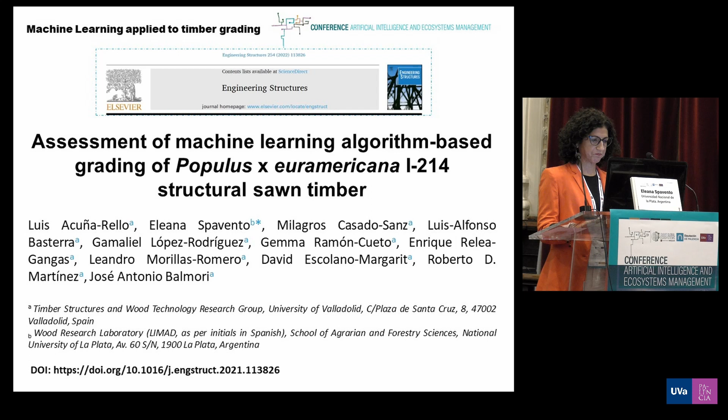So, to start talking about our work, I will pose a question. How is structural sawn timber graded? So, firstly, the species and provenance should be known. Then the sawn timber is inspected and its defects are evaluated and measured to grade it according to the standard. In this case, we use this Spanish standard because it's the only one that includes Populus spp timber, and it has two timber grading classes, ME1 or very good timber, and ME2 or lower quality timber or good timber. The third class is rejected or non-structural class, where the bad timber is included.

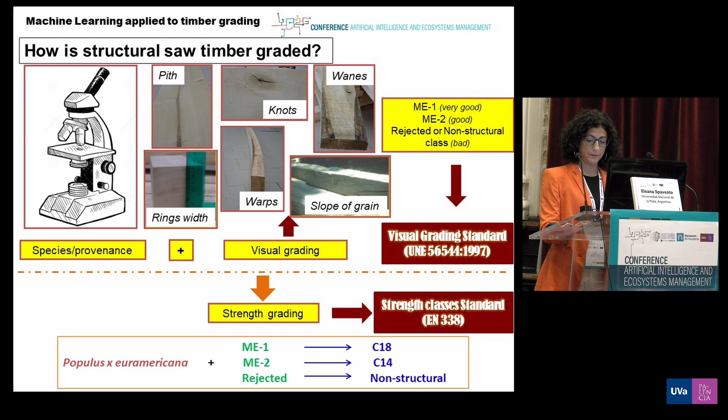Later, we assigned the strength class, and in our case, we use the EN 338 standard. This assignment is very important because it gives us reference values without hard and expensive laboratory tests, and gives sawmills a big opportunity to add value to their products. In this picture, you can see the visual grading classes, and in this graph, you can see the strength classes standard.

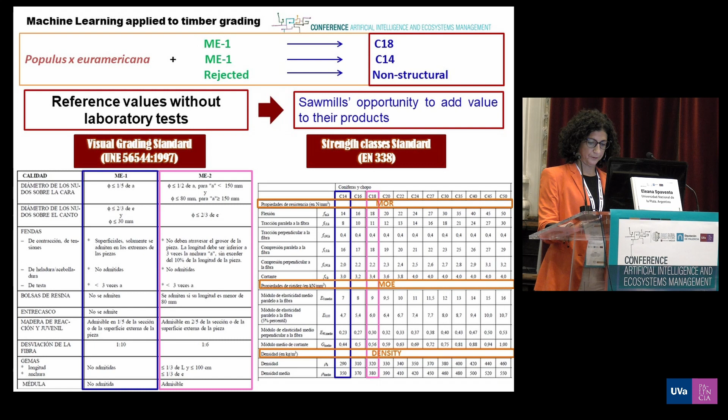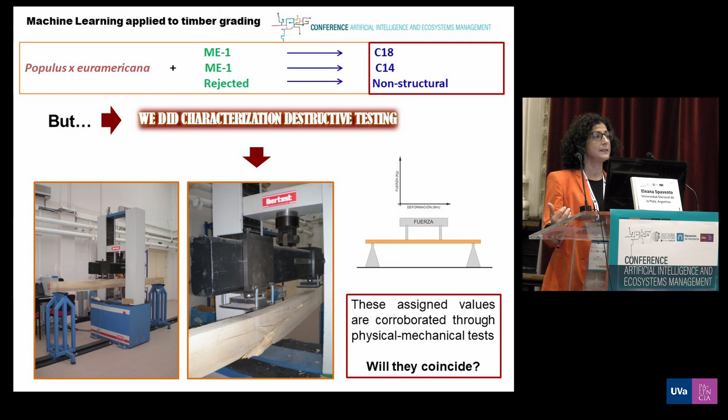In our case, these assigned values were corroborated through physical and mechanical destructive testing, because we need to know the real strength values, and to know if the assigned values coincide with these real values. And my question is, will they really coincide? Well, to answer this question, the main aim of this paper was to evaluate the classifying efficiency of supervised machine learning algorithms in 3 scenarios, and to compare the performance with that of the Spanish visual grading standard.

In scenario number 1, the specimens were grouped using visual defect variables, the set of input variables referred to as variable 1. In scenario number 2, other than the set of variables just mentioned, we also include cut type, that is to say radial, tangential, or mixed sawing system, which we refer to as variable number 2. Finally, in scenario number 3, we added to the previous variables 2 non-destructive tests, which allow us to determine dynamic modulus of elasticity by ultrasound and longitudinal vibrational analysis, which we refer to as variable number 3 or scenario number 3.

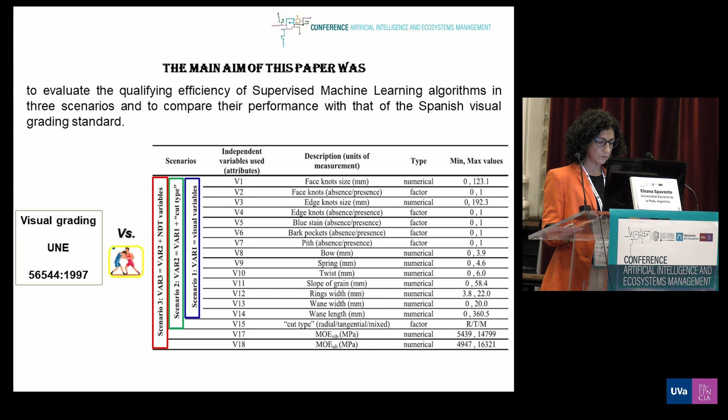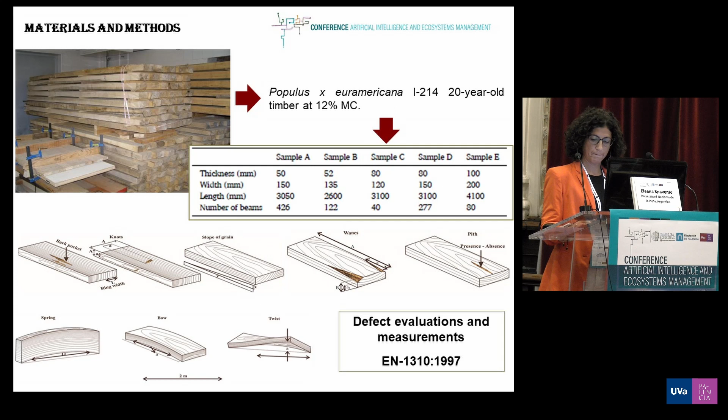But how did we work and what material did we use? In this case, we worked with this clone, Populus euramericana, 20 years old timber at 12% moisture content. The defects were evaluated according to this EN standard, 1310, and these defects were measured with this standard. Then all the samples were classified following this Spanish standard in ME1, ME2, or rejected class, or class number 3. These were also the input variables to scenario number 1.

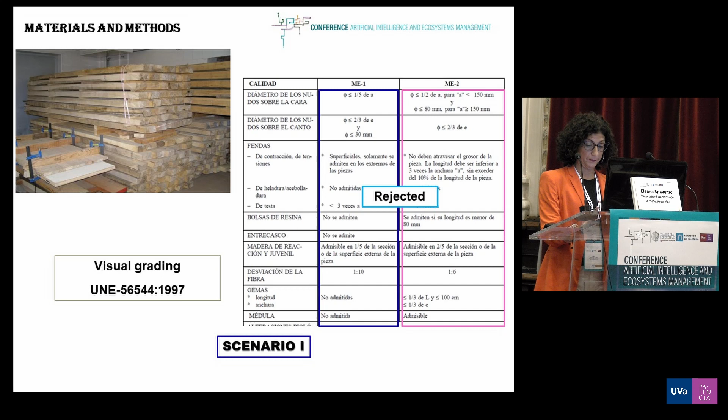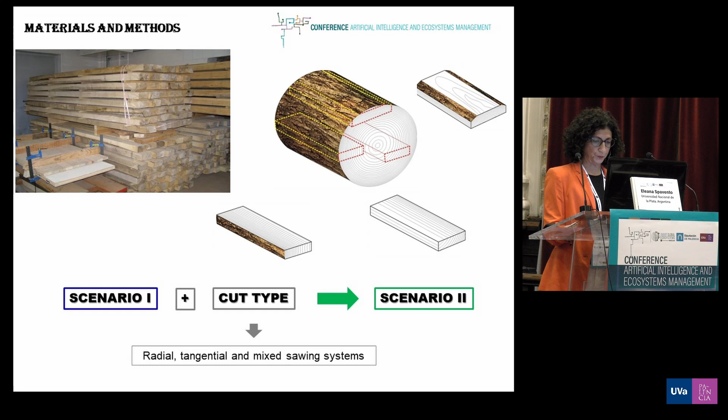Additionally, all the specimens were classified by cut type in radial, tangential, and mixed sawing system. The variables included in scenario number 1 plus cut type refer to scenario number 2. Then, all of the specimens were evaluated through non-destructive testing. In this case, we use a microsecond timer to determine ultrasound wave velocity, and an FFT analyzer to determine vibrational frequency. In both cases, the dynamic modulus of elasticity was determined. These variables, together with the scenario number 2 variables, were considered scenario number 3.

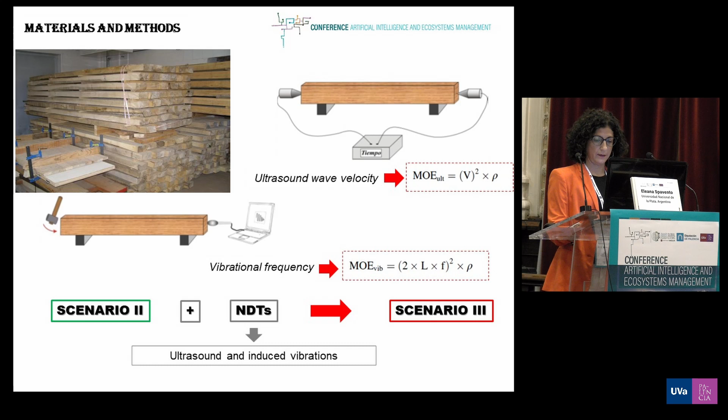But also, we need to know the real values of these specimens. And so we carried out static bending to determine modulus of elasticity, modulus of rupture, and density. Then, these parameters were considered as characteristic values, that is to say mean of modulus of elasticity and 5th percentile of density and modulus of rupture. We use these characteristic values because they are the most important parameters used to characterize this material.

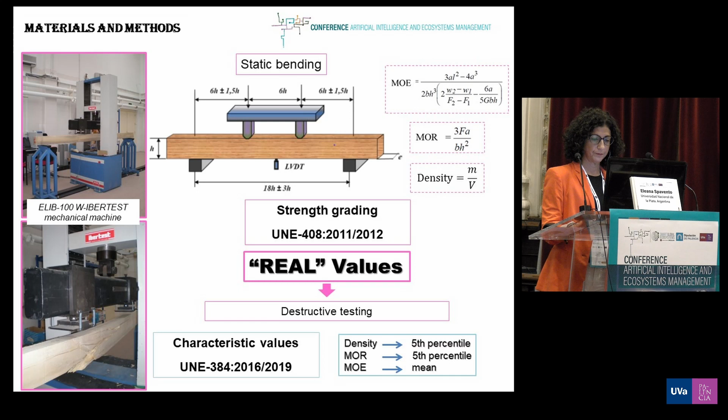415 beams were classified within the range C14 and C18, and 337 were classified below C14 class. Out of the total number of samples, 80% were used as data for training the classifier, and 20% were used as data testing.

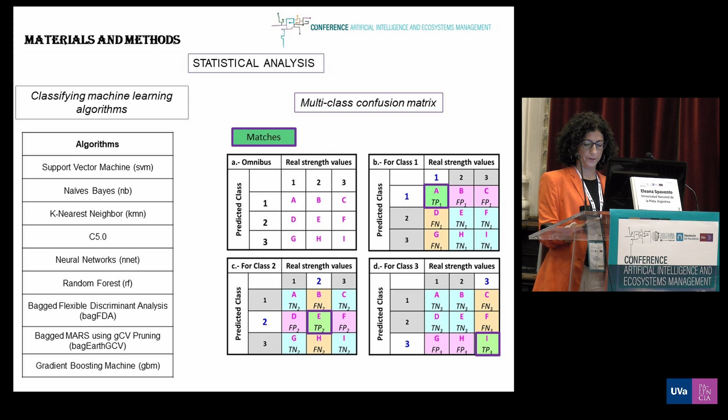In this graph, you can see the general confusion matrix, and in another graph, you can see a specific confusion matrix for each class: class 1, class 2, class 3. Here I highlight the metrics of this confusion matrix. To evaluate the classifying performance, we use different global metrics. These global metrics highlighted in red are the most important that we use.

Also, we use metrics by class; sensitivity, specificity, and precision by class were the most important ones that we use.

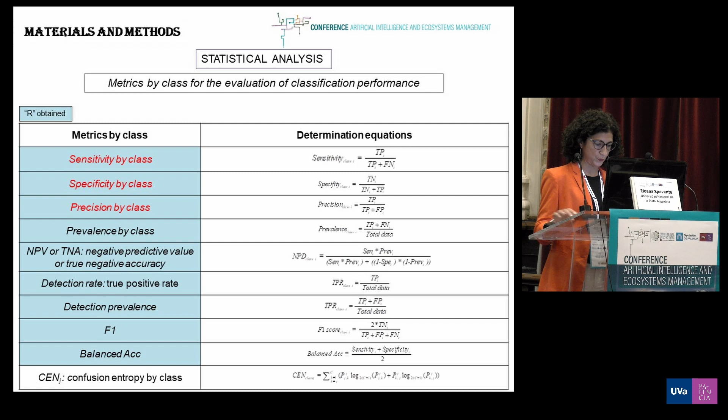Now, let's move on to the results. In this graph, you can see that the better parameter was obtained in M1, the higher visual class, but the mean of the modulus of elasticity did not comply with the requirement of EN 338, because the modulus of elasticity required by this standard is 9,000 MPa, and this value is lower than that.

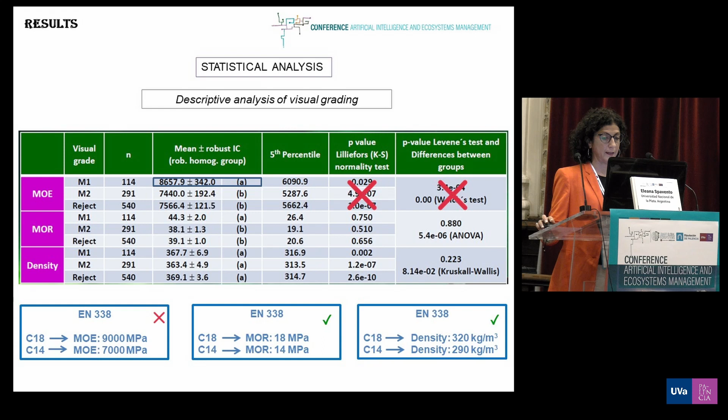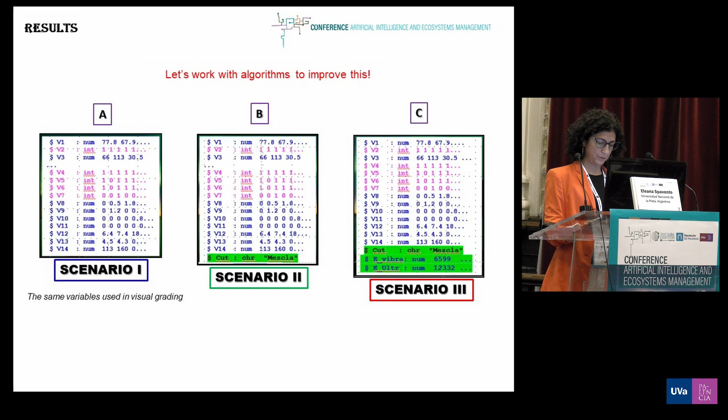When we add non-destructive variables in scenario number 3, we can see that the prediction improved in all of these global metrics, and for all 9 algorithms. When we test, for example, random forest, we found that the real values comply with the strength values required by the EN 338 standard, and the accuracy improved from approximately 55% in scenario number 1 to 66% in scenario number 3, that is the scenario that includes non-destructive testing.

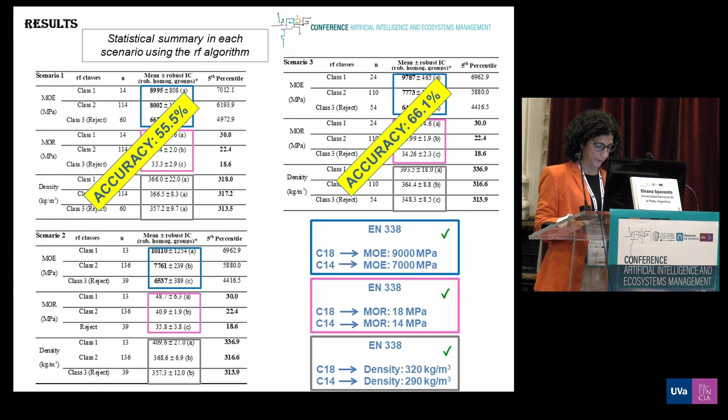But although cut type was only a slightly influential variable, it significantly improves accuracy in scenario number 2 and scenario number 3. Cut type in this case is represented by the V15 variable.